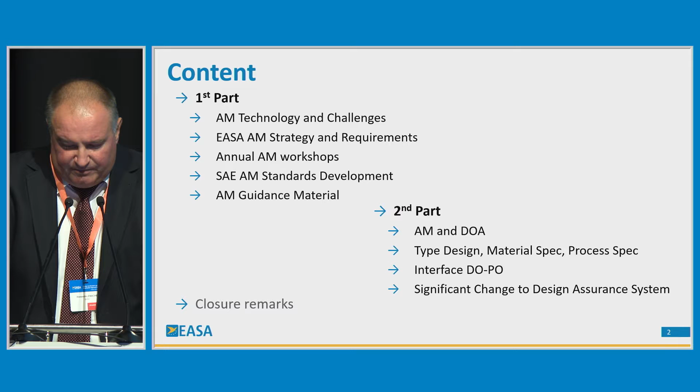In the second part, I will touch on some DOA aspects: type design, material specification, process specification, interfaces, in particular with production organizations, and also what is the impact on DOA if we have a significant change or not when a DOA is contemplating starting additive manufacturing activities. And in the end, some closure remarks. So I will invite now Wolfgang to go with you through the first part.

Thank you, Alex. So I have to take a deep breath because there are a lot of people here. And I would say, let's put the focus on you first.

So may I ask a question to you? How many of you have to deal with additive manufacturing technology currently? Can you raise your hands? Okay, well, it's somehow congruent with our general observations.

But I think I can focus a bit more on the first three introductory slides, which are more technical, to explain what it is.

So what you see here, I'm afraid it's not good quality, but you may see this is a kind of CAD system which is building up layer by layer the electronic part. It doesn't take so much time, but you see the part is being built up in an electronic way. With additive manufacturing technology, we can do it with hardware. So this is a big difference. It takes a bit more time than just doing this via bits and bytes, like here in the picture.

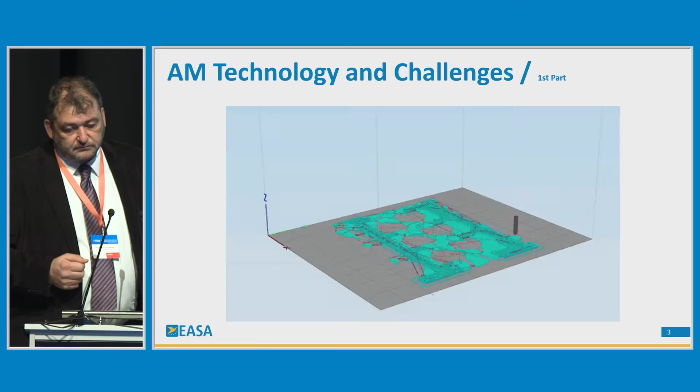But there are different technologies. They all have one thing in common: you have meltable or fusible material, and you melt it layer by layer and build up the part after a certain long time. Different technologies are available for this, so you can do this with laser melt techniques, where a laser is melting material, or with an electron beam, which is also melting the material. You just have slightly different possibilities with the methods, with advantages and some disadvantages when you compare them.

So let's go to the next slide. When we look at this technology, it's quite nice actually. You have a starting material, feedstock material we call it, which is mainly metallic or polymer. You can get it in the form of powder or in a more solid wire or piece of plastic. All of this will be melted in the second process in a machine, which shouldn't be somehow a black box - it should be more a white box, like it is depicted here. With white box, I mean you should know what the machine is doing in detail, because it may have influence on your material, on structural strength or fatigue properties.

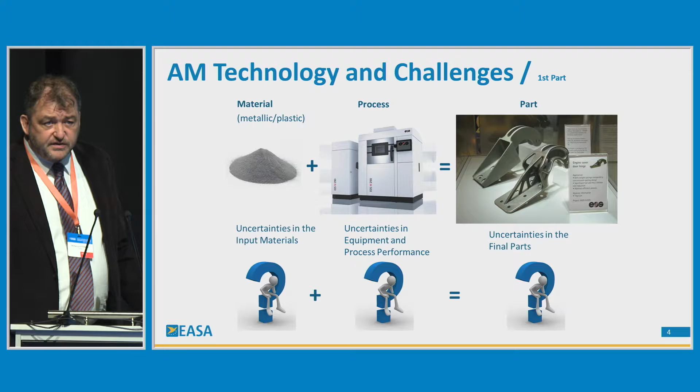So finally, after the print process, you will have some nice shiny parts. They're looking good, just ready for installation, you would think. But this is not really the case. You would have to do some post-processing for this part - surface finish to remove the surface roughness, which can also initiate cracks. And you would have to be sure that the bulk material is really okay, no voids in there, no hollow things with unmelted material. So you have a lot of uncertainties in the final part - uncertainties in the machine, and uncertainties in the input material, for example in purification of the material, when you have too much oxygen in your metal powder.

So lots of things can go wrong during the melting process, and you don't get the material you would like to get, or you are used to get from the machining area. So we have a lot of questions, but it's not an unsolvable problem. You just have to put a bit of effort into it to understand the whole process behind.

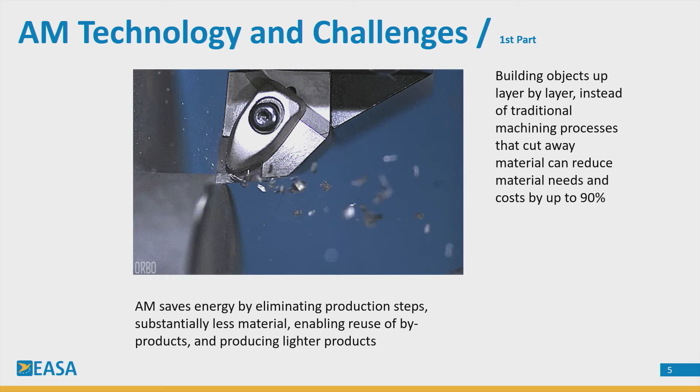So we come to the next one. This is the old era, you know. We have a big piece of metal. We machine it so that we get finally the form or the shape of the part. And of course, you are producing a lot of metallic waste. You would have to reuse this, and so it costs a lot of money. And this is a big disadvantage.

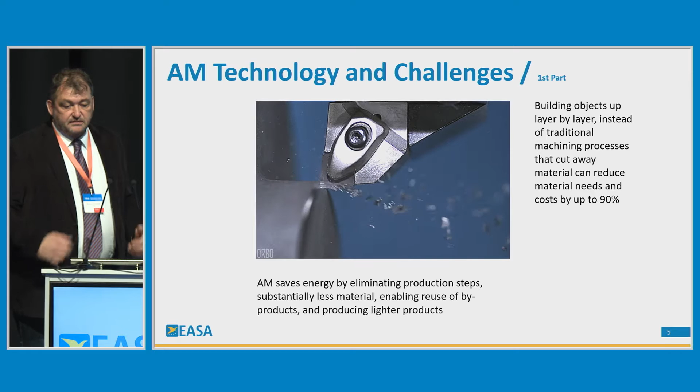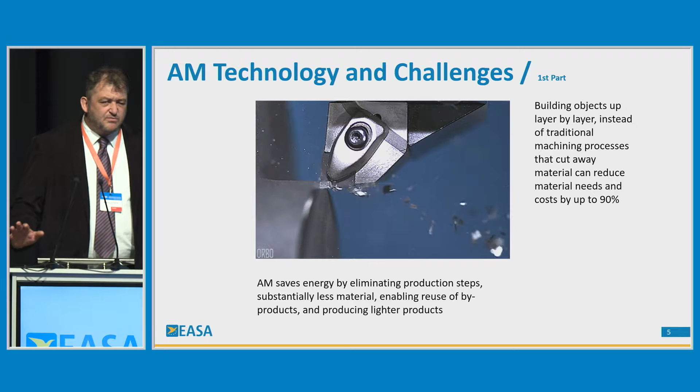With additive layer manufacturing, you can build an object with just the material you need, more or less. You build it up layer by layer, and you don't have so much debris. And you have other really big advantages. You can reduce the material needs and the costs up to 90%. This is a maximum value, I would say. And you can, through specific design, also achieve a tremendous weight saving, up to 40%.

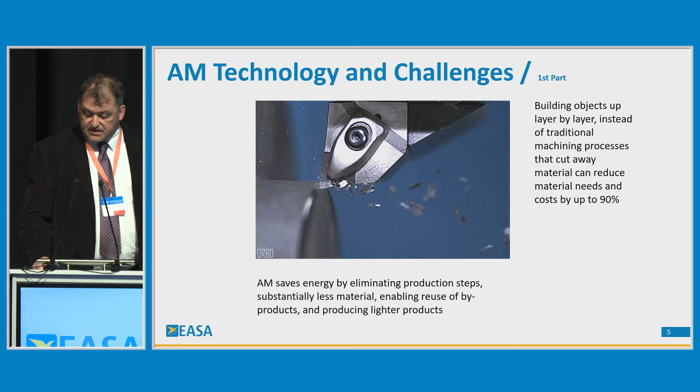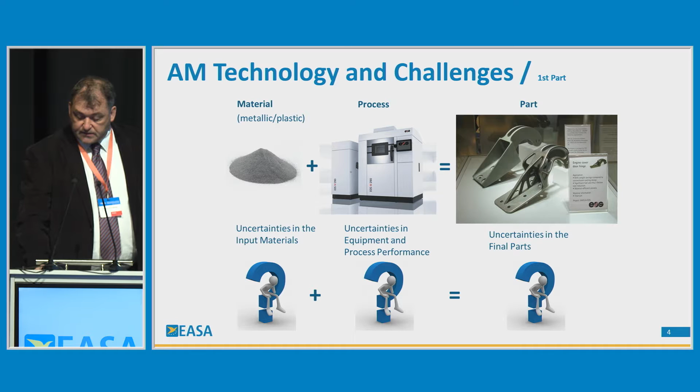Okay, going back again. So we don't want to do this anymore. Of course, the optimum thing would be if you could print everything.

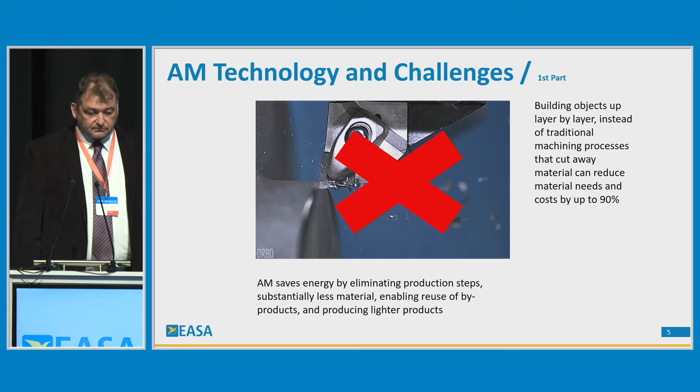We propose our strategy. As an airworthiness regulator, normally being approached by such a technology, we don't know that much about it. So we have to gather some experience, and we have to rely on the industry to have information exchange, to understand the technology and the processes behind, and the product which is being produced, and its dedicated use in aviation. This is a very important thing, number one.

The second one is we have to identify a potential safety or environmental risk. Is there a specific risk on the part when we don't know the material properties, or there's a widespread in material properties? Of course there is a risk, and we have to be aware of this, and we have to try to mitigate those risks.

So we are working closely together with the industry to get all that information, to discuss all those things, and also with the NAAs, who are under responsibility of surveying the POAs, the production organizations, who are applying those machines, of course.

The further step is, once we are aware of what the risks are and how we can mitigate them, we have to monitor the evolution. The machines will be developed further. They started initially with a single laser machine for metal melting. I'll just refer to the metal process to make it easier to explain - there are others as well, but there's too little time to explain this.

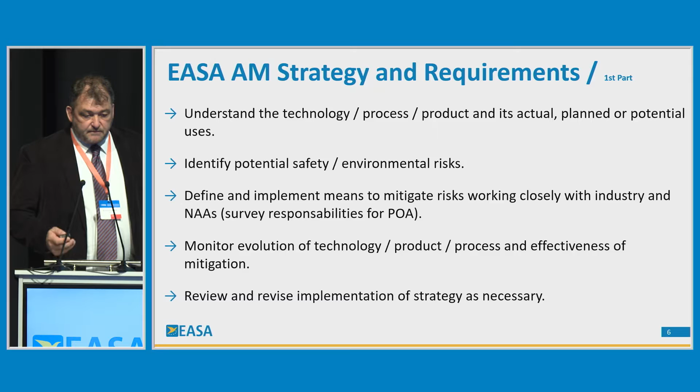So I guess one of the main questions from your side is, do we need any new additional requirements to cope with the new technology? That would mean more effort to show more substantiation, which of course involves spending more money, and this is possibly not very much appreciated by you. The answer is, currently we don't need new requirements. Our top-level requirements, Part 21 and the CSs, are enough - they cover everything. I will come later to the main paragraphs which deal with this.

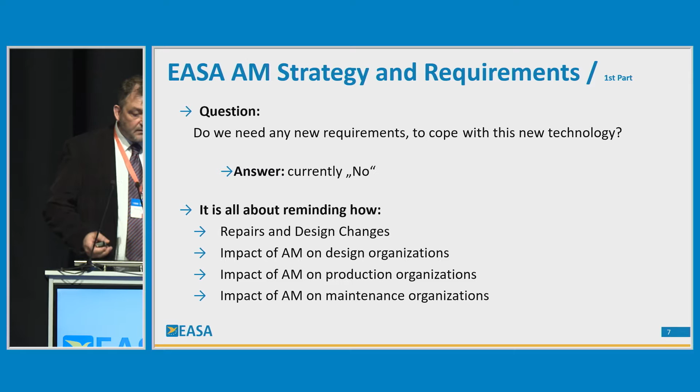And we would mainly like to remind how repairs and design changes have to be done in detail, and what the impact of AM is on design organizations, on production organizations, and on maintenance organizations. This will be explained a bit more in detail in the second part by Alex.

The requirements - the governing rule is the 25.603 requirement for materials. It says the suitability and durability of materials used for parts, the failure of which could adversely affect safety, must be based upon experience and test, conform to specifications, meeting design data, of course, and consider environmental effects - temperature, moisture, etc. So this is the requirement we start with.

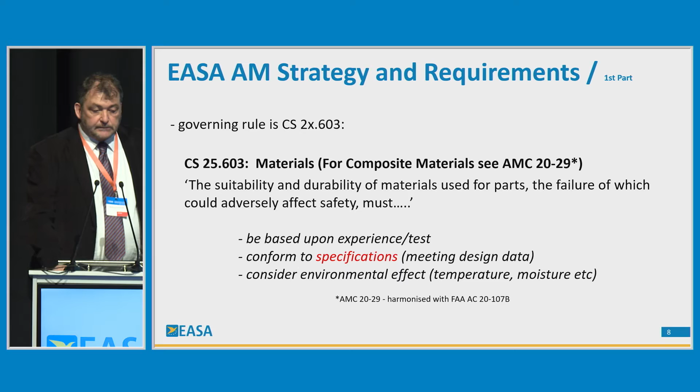The next point about materials starts with 605, the fabrication method, and this is additive manufacturing—obviously a new technology, a fabrication method. They must produce a consistently sound structure, without any spread of material properties in the best case, and this is where we have to be sure. So if a fabrication process such as gluing, spot welding, or heat treating—let's say laser welding—comes close to additive manufacturing with laser melt methods, all this requires close control to reach these objectives.

The process must be performed under an approved process specification, and we'll come to the process specification later. It's also a very important thing—this belongs to the EASA strategy as well, that we are involved in developing those process specifications.

And we have point B: each new aircraft fabrication method must be substantiated by a test program. That says it all—when you buy such a machine, a new method, you have to do some substantiation.

What would be the extent of this substantiation? Well, it would depend on whether you'd like to produce critical, safety-critical parts for an aircraft. Then there's a lot of substantiation, and we would switch to 613. If you have less critical or non-loaded parts—let's say polymer material in the cabin, like an armrest cover—you would possibly just have to do fireproof testing, and that's it. This is not safety relevant if you have a broken material finally.

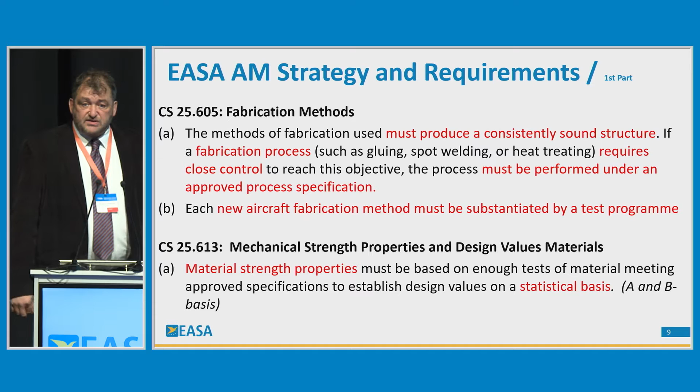For 613, of course, when you have critical parts to produce, we have to establish design values on a statistical basis—the so-called A and B basis. This is a different confidence level. For A, we have a confidence level of 99%, meaning that when you check the material, the properties should at 99% always be the same when you have hundreds of samples. This would have to be done for additive manufactured parts or material as well, so you would have to do statistics, produce a lot of samples, do a lot of testing, to find out if your process is really stable, producing good material.

The other side of this is, to gather experience on this new technology, we are arranging workshops with industry and with other authorities together. The first of them were quite generic, just doing presentations to see how far people are, what they are doing. We did the first one in 2016 in Cologne, and the second one the year after, and it turned out to be a good thing to do every year.

So you see the development—the first two were generic, to get a rough overview of what is being done with this technology in the industry. Then it gets more specific, similar to this workshop here, with breakout sessions before the presentations, so that all participants can really discuss the points which are very important for them, to discuss their needs. We've tried to do this as well now, so we've changed to a more specific topic on additive manufacturing.

One of the first ones was in 2018, on machine knowledge and training. We invited machine producers and users, put them together, and let them discuss—what are the needs?

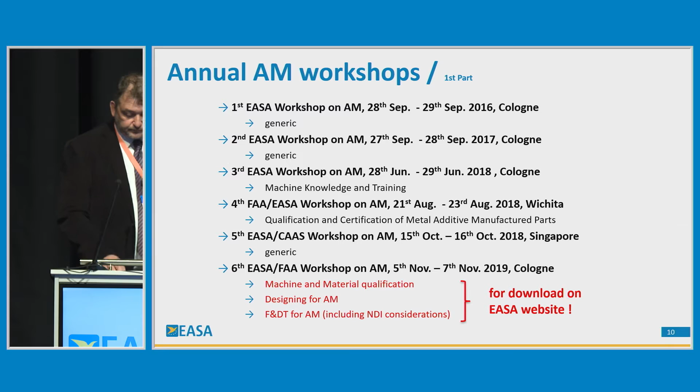An additional thing is to be involved in the standardization work. That means we have to have specifications for the material and for the machine process, and this all has to be discussed with industry, with experienced people who work with the machines. They know what are the bad things you can encounter.

There are some subgroups for specific specifications. This is a powder specification, the feedstock material - you feed the machine not with ink and paper as at home, but with metallic powder or polymer powder, for example. A specific specification is necessary because you shouldn't mix powders from different batches or lots, which may be dangerous. You should have powder incoming control, and store the powder accordingly, since moisture is often an issue, under specific conditions. All this will be mentioned in those specifications.

You have process specifications for the machines themselves - electron beam EBM, laser beam melting, powder bed fusion, wire, directed energy deposition. Those are the main methods we are using. In those specifications it's fixed what are the problems and what kind of parameters you should have constant and under control.

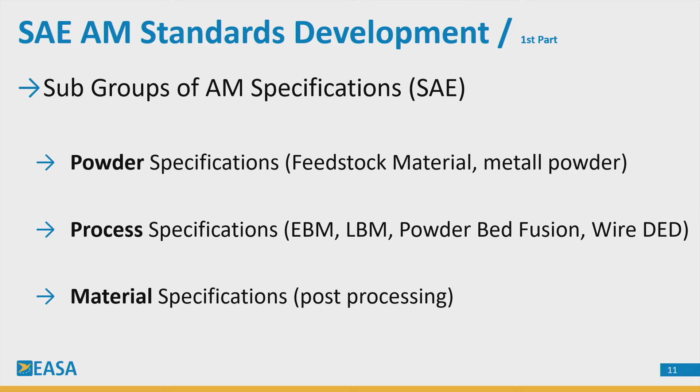Then we have material specifications. Do we have to do post-processing of the material? For example, there's a very famous hipping process, hot isostatic pressing. For small voids - areas of non-really-melted powder in the material - you can heal this via post-processing. Hot isostatic pressing is done at high temperature for 3 hours under 1000 atmospheres, just below the recrystallization temperature, and it heals the material so small voids vanish.

This doesn't prevent you from doing fatigue tests on those samples as well, but it's solvable. Some OEMs who put a lot of effort into this have shown high repeatability, even higher than for castings. For castings, we have factors we apply to cover flaws in the material, but for additive manufactured parts, some OEMs who put a lot of effort and money into this found that if they hold all processes stable, they don't even need a factor like for casting. So it seems to be a good way.

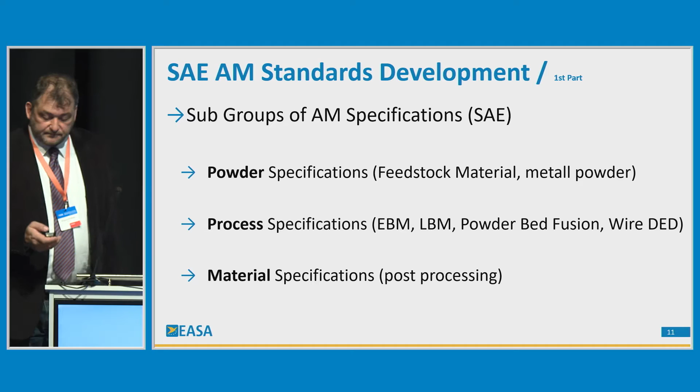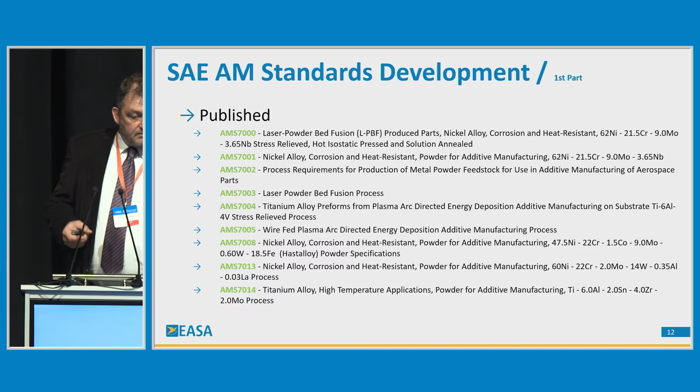This is what we are working on. The green ones are the published standards from SAE. You can briefly read: you have powder specifications, laser powder bed fusion process specifications - the 7003 and so on for different materials. You have Inconel materials, and the most advanced one is titanium 64, which is 90% titanium with a bit of aluminum and vanadium.

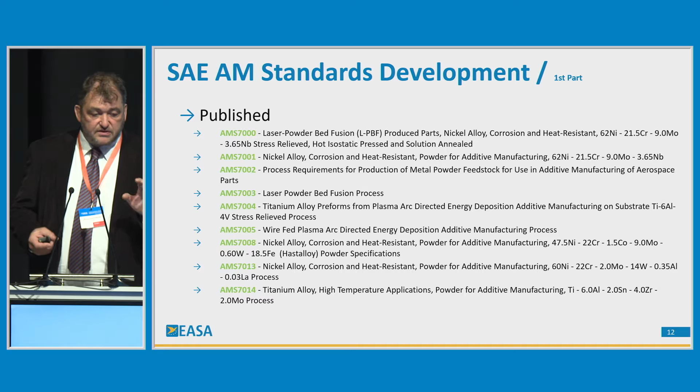Those are already published, so you can purchase them. And if you want to use one of those materials, our strong recommendation is please go into the specifications and try to work along them.

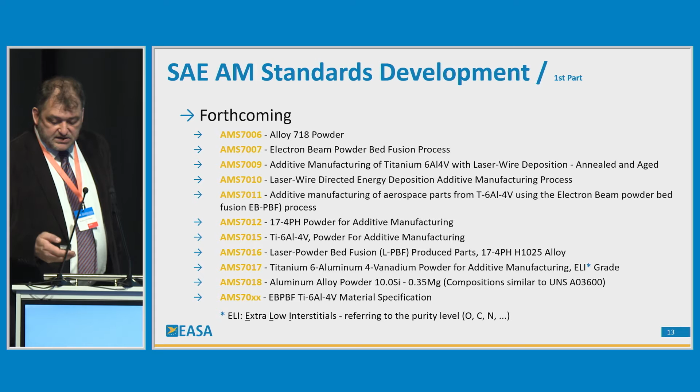The forthcoming ones are these here - still not published, but they will come. For example, we have a process specification for electron beam powder bed fusion, and so on. This is something you can take some time to go through and make yourself confident with. A further thing is we try to give you a bit of guidance, so for that reason we are tracking the technology.

We're trying to get some information to be experienced, and not to say we can't say something on this because we don't know anything. We know indeed something on this. And in the meantime...

These are the structures requirements, because I'm the structures guy. There are others - we see engine requirements, propeller requirements, Part 21, and so on and so forth. Those are mentioned there, and we've explained why we need those requirements and why you have to put a bit more focus and effort on this under the light of additive manufacturing. The purpose and scope of this guidance is that we would like you to really work on our expectations.

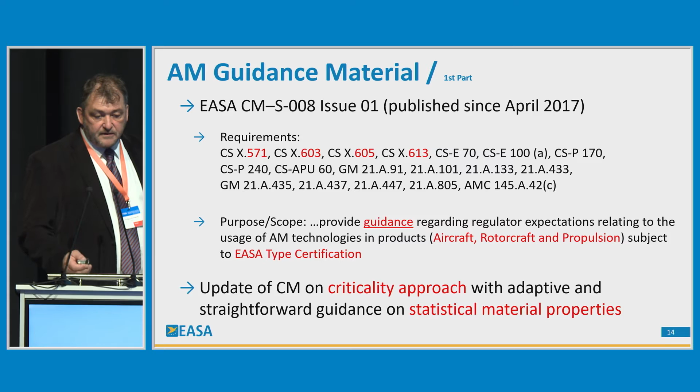The last point from my side is we will give you some guidance for the POAs, DOAs, and MOAs. There's a possible need to increase awareness of closer relationship between those organizations, because there is interference. So we would like to give some guidance on that, and make you aware of the existing rules there.

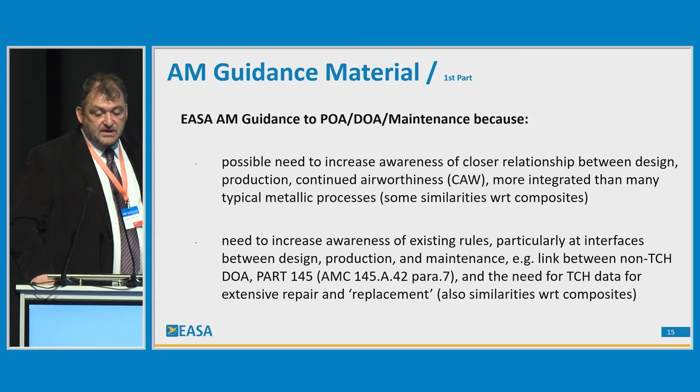Thank you, Wolfgang. Okay, after you've seen a little bit of the technical aspects of additive manufacturing, we'll now go through some DOA aspects. First, I would like to show you some short statistics - we did a survey through the DOA team leaders at the beginning of this year.

According to the answers, still a limited number of DOAs are involved in additive manufacturing activities. I saw earlier, when Wolfgang asked you, a lot of hands in the air, but still that might mean not so many DOAs yet are involved in additive manufacturing.

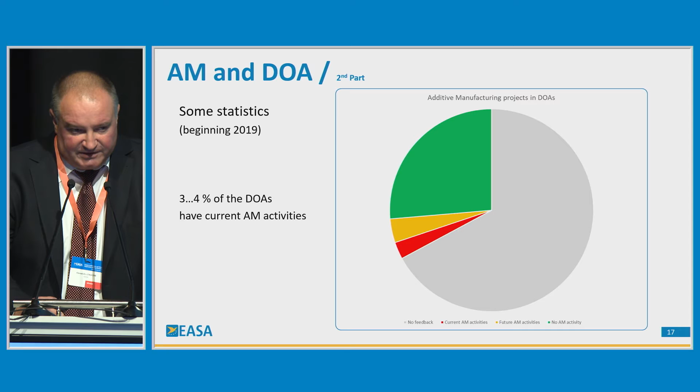There's also a large gray part here, so some of you maybe have not yet made up your mind and not provided feedback to us on this topic. I will come back at the end with, let's say, a recommendation for this.

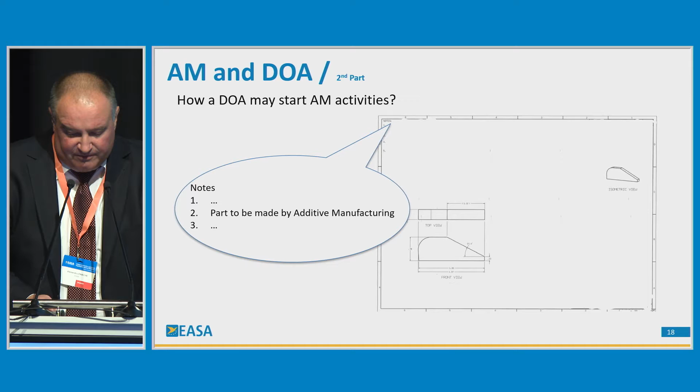Now you may ask how a DOA may start additive manufacturing activities, and I took maybe a simple example - hopefully nobody will recognize your design data here. You want to manufacture a part through additive manufacturing. Will it be enough to say in the notes, for example, that this part has to be additive manufactured? Maybe the answer is no.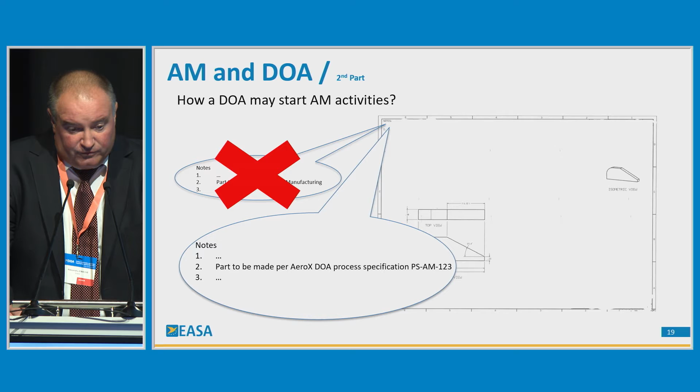So you may need to actually refer to a process specification for doing this part through additive manufacturing. And you've seen from Wolfgang's presentation that this process specification is particularly required in some of the CS requirements, some of the airworthiness code requirements. And if this is the case, then obviously your manufacturing specification, your material specification will become part of your type design.

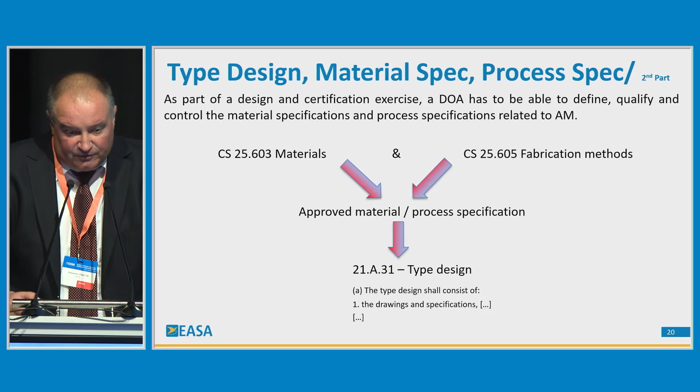As such, we are expecting a bit more elaboration from the DOA side. You've seen already that additive manufacturing depends on a large number of factors. Depending on the particular application - loaded part, non-loaded part, plastic, metallic, different types of processes involved - you may have to come up with a process specification. I just want to present a few items which might be part of this process specification. Don't take this list as exhaustive - it's not.

You have to explain what is the scope, what type of additive manufacturing process you are defining, what is the applicability, what are the limitations, for example what kind of parts you may manufacture according to respective specification, and what are the materials.

Of course, you will have to refer to material specification, but you may also have to add handling requirements for the material, storage requirements, and so on.

What is the machine, equipment, and tool used for manufacture, including the machine manufacturer, the type of the machine, calibration, maintenance. Facilities are important as well. The machine environment may impact the result of the manufacturing process.

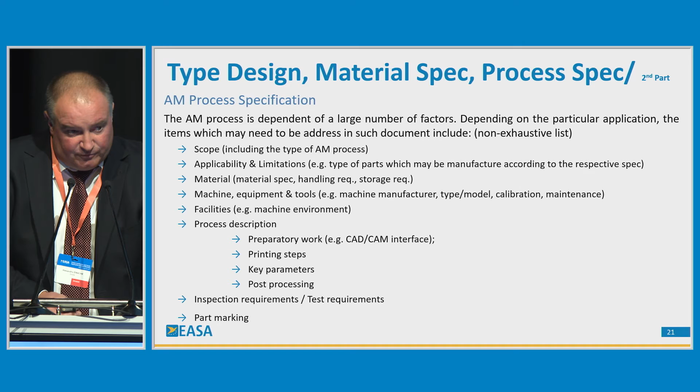Again, the list is not exhaustive, it's just trying to provide you a hint on what kind of topics have to be addressed in a manufacturing process specification.

You have seen that there are already quite a number of industrial standards available. You may refer in your process specification to these standards as applicable.

But you may also need, depending on the application you intend to use additive manufacturing for, to qualify the process to demonstrate that it complies with the defined specification and that the parts can be manufactured in a reproducible way.

I want to highlight that material and process specifications are not only part of the type design, but also answering some CS requirements, some airworthiness requirements - they can be considered part of your compliance demonstration. And as part of type design...

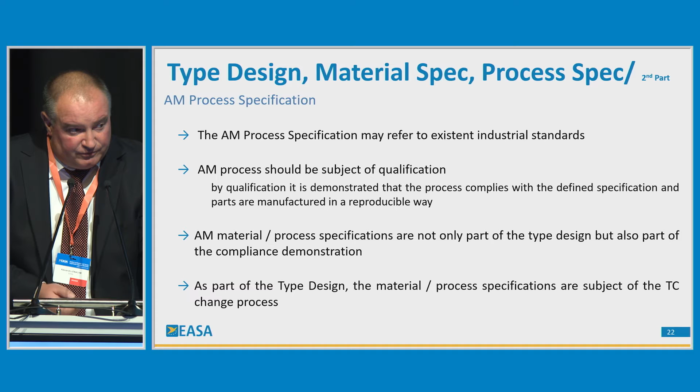the changes in material and process specification are, of course, subject to the changes to type certificate process.

Now, I think Wolfgang already mentioned a little bit on interfaces between design and production. There is a clear link. There are specific aspects you need to address in these interfaces, like transfer of design data, generation of the manufacturing data by the production organization, and as I mentioned in the previous slide, the qualification of the additive manufacturing process. This is all done together with the production organization.

And yeah, I've seen some of the questions you started to ask sitting at the table there. We'll have maybe a little bit of time at the end to address some of these questions.

But indeed, there are additional challenges if the manufacture is done under a maintenance environment and not a production environment. We are looking at these aspects. For the moment, I would say that additive manufacturing in a Part 145 organization is not possible according to the current rules we have, but we are looking into this aspect.

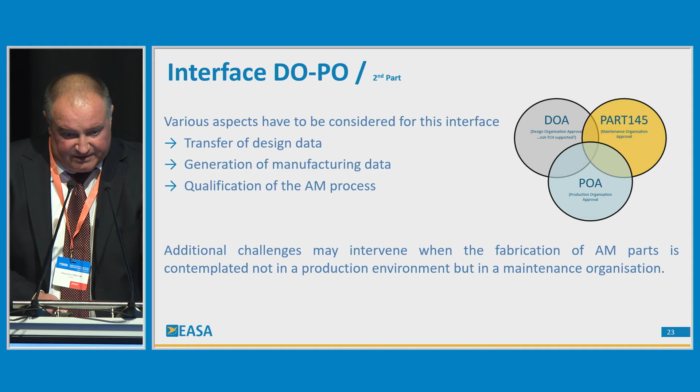Now, is it a significant change for a design organization or not? Again, depending on the particular application in which you intend to use additive manufacture, there are quite a number of activities you need to develop.

And of course, we are looking to have these activities performed according to your defined procedures. So you need to have procedures for defining process specification, for defining material specification, and for qualifying them as needed. If you don't have such procedures, according to the requirements we have in 21.A.247, we will consider that if you intend to introduce this procedure, it's a significant change to your design assurance system.

However, even if you already have these procedures in place for defining process specification and material specification, if you intend to use these procedures for the first time for additive manufacture, I would encourage you to discuss with your DOA team leader and offer us the opportunity to be next to you when you are starting this new activity.

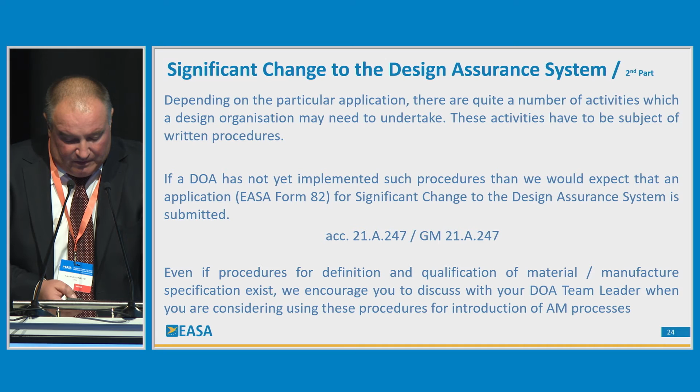Of course, when reviewing your significant change for introducing additive manufacturing, we will look at the usual topics for this, which is type design definition, configuration control, how you classify changes, how you establish a certification basis, how you use the qualification of the manufacturing process, and what kind of testing is involved.

You may use suppliers as well, so we need to look at the interface with the suppliers, with the production organization, and to look at the training as well, which is important for a relatively new technology which you intend to start activities on.

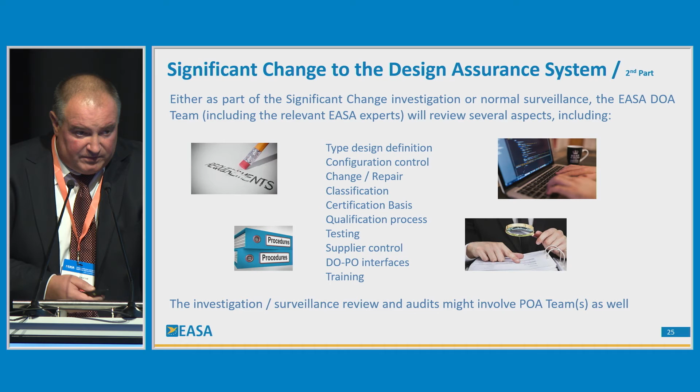We will work normally together with production, with the POA team, which can be an EASA team or a National Authority team, depending on the case.

Some closing remarks. I would restate the suggestion to contact your DOA team leader and discuss your additive manufacturing intended activities. You may also contact our internal EASA working group on additive manufacturing - you have some contact details there. It covers all kinds of disciplines: structure, propulsion systems, cabin safety, DOA, POA, maintenance.

Wolfgang showed you some of our events which are organized each year, so I would recommend you to follow these events. There are dedicated events where you can get more information on this topic. Follow also our news, for example the latest issue of the J News has a small article on additive manufacturing as well.

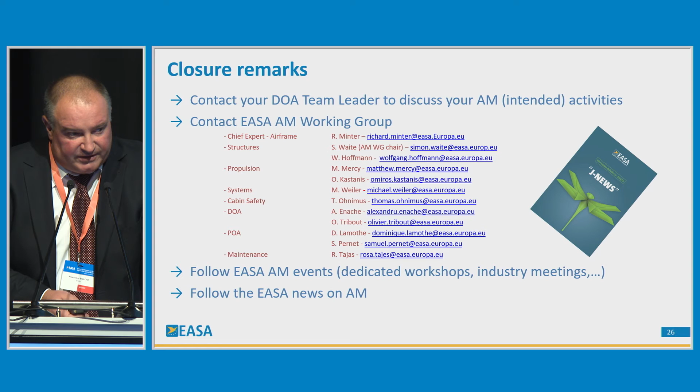Thank you. And if we have time, we can probably take a few questions. Yeah, I think we can take a few questions. Some of them that were asked are already answered by your presentation or Wolfgang's, but there are still a number of questions. I don't know whether Wolfgang you want to start, or Alex, we have some on the screen. Yes, I can take one of them.

By the way, within the LOI framework, will there be a requirements timeline for additive manufacturing to not be novel anymore in the eyes of EASA? My comment on this is not actually an answer, but more a comment if you want. Actually, the novelty is not referring to the agency itself. We are looking to novelty for the respective DOA, for the respective applicant in the respective project. So novelty may still be there for quite some time.

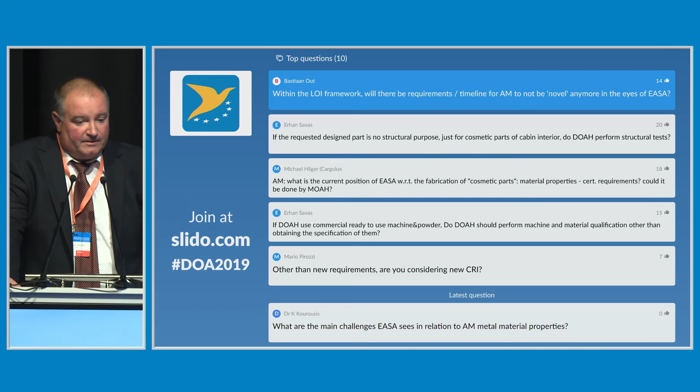Okay, next one, possibly from Erhan. If the requested design part is no structural purpose, just for cosmetic parts - this is what I've tried to explain, so there are indeed some cases for non-critical, less loaded parts, like the famous coat hanger or armrest covers out of plastic, where you really have reduced requirements to fulfill. So this is what we are coming up with in our second issue of the CM. We will try to give you some guidance where you have easy certification, let's say, and where it would become a bit more difficult.

I think on the other we touched a little bit already. Yeah, there's another one, this is from Trevor Jenkins. Process variability, how does that mean for production? Yeah, this is the thing, what I've tried to explain as well.

So, how you would have to produce the data - this is according to the 613, and if you have, first of all, you do a classification. What do you want to manufacture? Critical, less critical, loaded, non-loaded. And due to this classification, you go possibly, when it's critical, into the 613, you have to do the A and B basis. This is explained there as well in the AMC material. So you have finally to do a lot of samples and show that your process is stable and the material properties have a confidence value of 99%. So that means almost always the same properties.

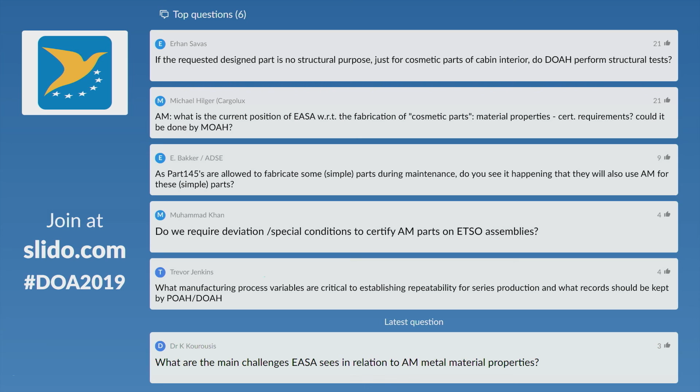Okay, maybe one more question due to the time. I don't know who wants to choose one. The first ones I think were already answered. There's one - may I take this one from Trevor Jenkins as well? So this is about repeatability. Well, I think it vanished from the list. The second was: yeah, exactly - what manufacturing process variables are critical to establish repeatability for serial production?

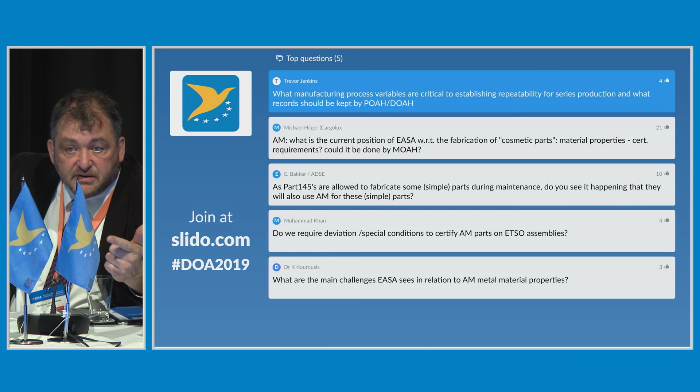This is exactly what we try to transfer with the standardization material. That means the process specification, the material specifications, which had been worked out by industry and authority in the SAE working group, and by the way, of course, also in the ASTM working groups. So you would have to take those materials, and then you can see what is being considered as the most critical parameters due to repeatability.

The one on deviations and special conditions by additive manufacturing parts on ETSO assemblies - I don't know whether you can answer to that. We can take that question back and try to answer it offline. Okay, thanks a lot, Wolfgang and Alexandru.